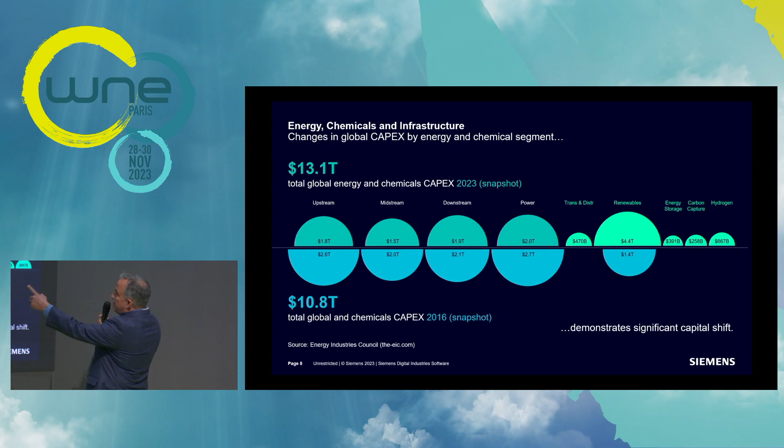And let's look where the money is going. If you look at the EIC, the Energy Industries Council, back in 2016 when I joined Siemens, we took a snapshot of what was currently in planning or execution or decommissioning throughout the energy landscape. You had across the globe over $10 trillion in investment. That's now increased to 13 trillion, and as you can see, it has really shifted into clean energy tech.

And you know, I'll take a moment. I've heard some people say part of the problem is the slope of the line for energy. I would say that we're only going to see more demand for it. So it's that type of energy. It's where are we getting our energy from? I mean, if you imagine nuclear coupled with hydrogen production, imagine the clean footprint you've just developed on the global stage. Incredibly powerful.

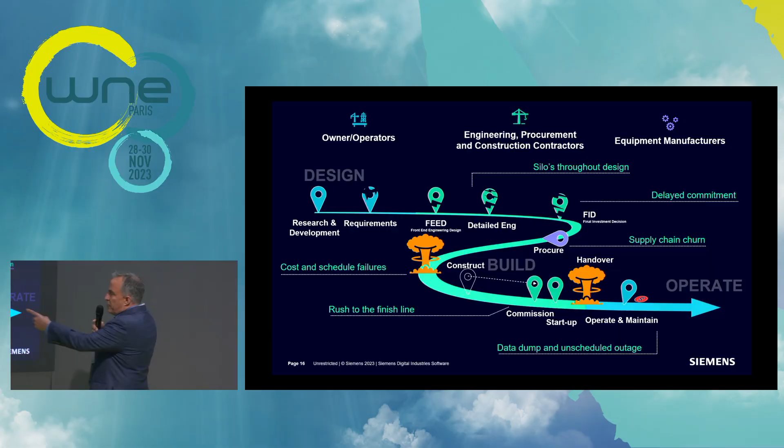And change management during construction is the worst time to manage change. And it happens all the time. Our species has got to get better at doing this. And then construction pushes commissioning forward, or actually back, which then crowds startup, which then does what? It puts a lot of problems on operations' shoulders. So this is typically what we've done. This is what we need to have.

We need to have a solid life cycle, a solid physics-informed digital twin that represents the sum total of all the data, data sheets, drawings, documents, and models that were created, hello, computational fluid dynamics, through the process. We have to have that. Now, it becomes very complex, but it's not. If you create an elegant, not product lifecycle, but capital asset lifecycle management process, then you can bring all of the design from any third party.

And I'll have a story to share if we have the time, or we can share it in the room back there. So I'm not going to steal your thunder so that you can talk about it.

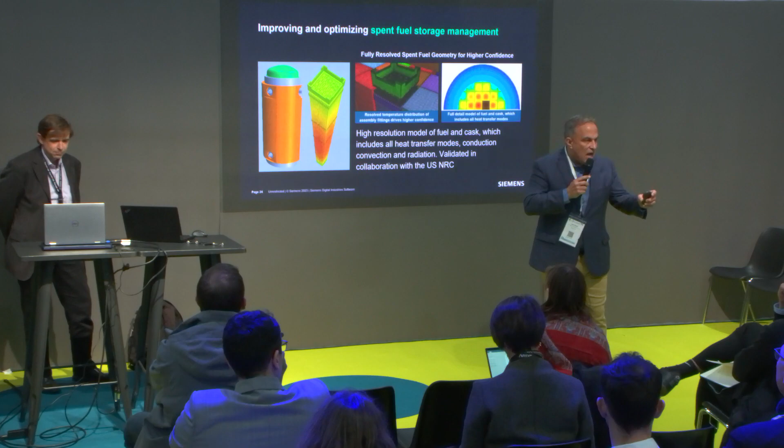But when I talk about simulation, we talk about improved economics for SMRs. You talk about reducing thermal fatigue, exploring sparger configuration, fuel performance, plant-wide performance, and optimizing spent fuel storage. All of these represent how we can turn that life cycle into a solid, well-performed design, build, and operate environment that Nicola is going to talk about, that he's at the heart of.

So again, when you come back to this, we have to be mindful that when you're doing simulations, we have to do it in the context of a broader life cycle mindset, a manufacturing mindset for us in the field. In fact, Brian Ferguson, who used to be the CEO of Cenovus, when we had the last downturn in oil and gas in 2015, and everybody was losing money in energy that was in the oil and gas business, his statement was, we have to apply a manufacturing mindset to capital projects. We have to take that same detailed life cycle view on assets and apply that in the field.

And so now that's driving modular construction. Now that's driving a greater focus on simulation going forward. And what excites me the most is I'm standing here in front of everybody in an industry that is bent on developing a new model. So all of us are students of Buckminster Fuller. All of us are rethinking, how do we actually drive fabrication, align it to requirements, make sure it's adherent to the simulations we did, that the simulations you did are now implemented in the field with that process simulate.

We are here, all of us, building a new model, and nuclear is the new model for our species going forward. And that's what excites me. So while I like to say it's a nuclear renaissance, my colleagues like to say it's a nuclear revolution. And it's not only started, it's actually accelerating.

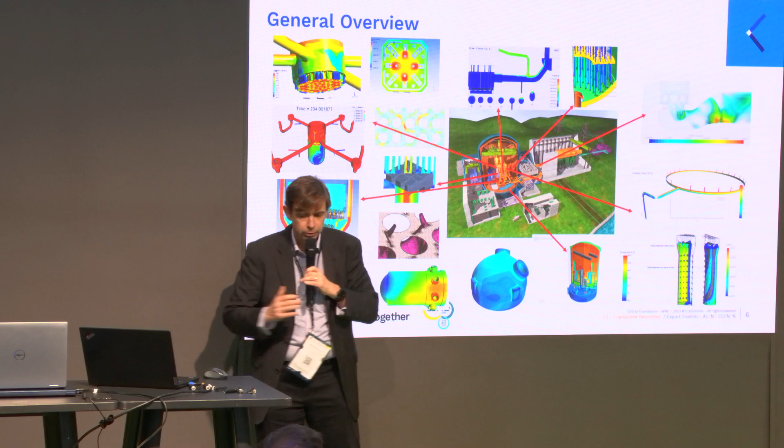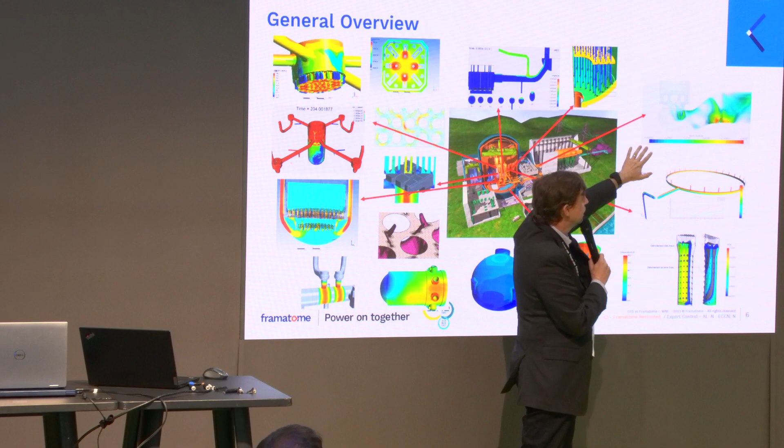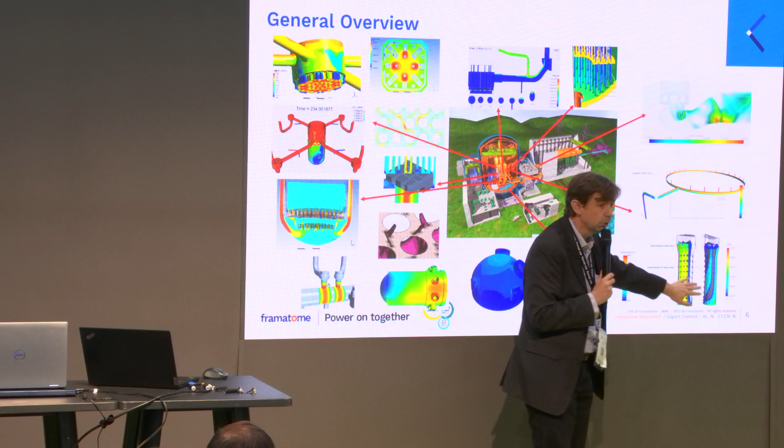We are performing some compressible flow analysis in order to assess the maximal flow rates that you can remove from the safety valves, for instance. We check that the design of the safety valve is okay. We're also working on the secondary side on issues on mixing inside the main feed water torus here or inside the downcomer from the steam generator. All of this means thermal loadings on the components, and we ensure that our components are fit for service for 60 years.

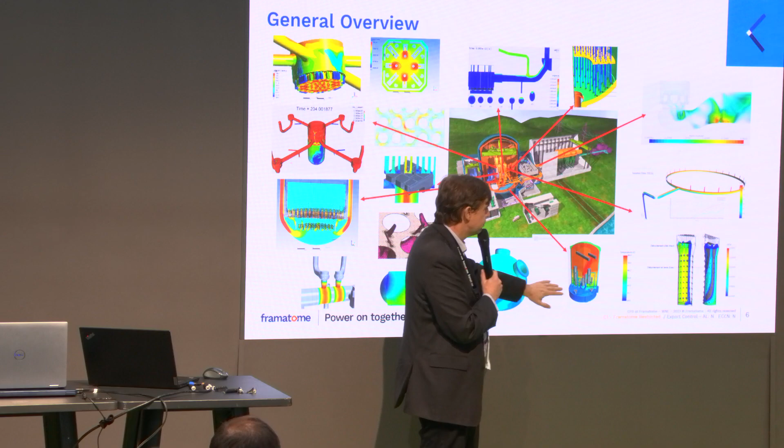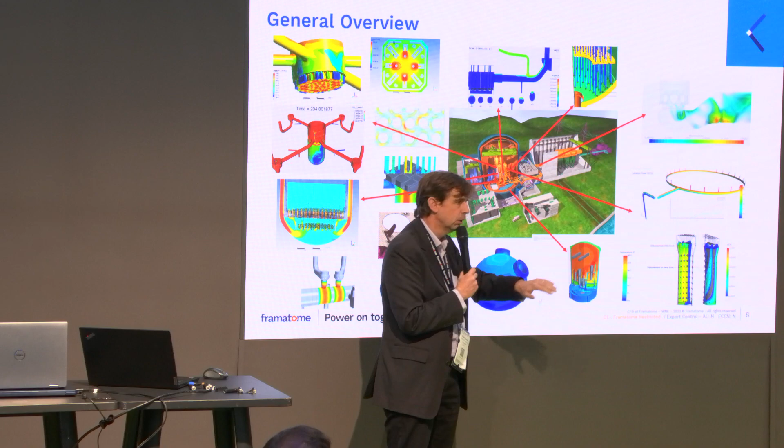But that was inside the pipe. But if you look outside the pipes, then we have also models for the buildings themselves. When you operate the reactor, there's a lot of heat that goes inside the building. During the outages, you want to get inside the building as soon as possible. So we are performing some detailed analysis to inform the people of what would be the expected temperature in the different rooms so that they can access as soon as possible.

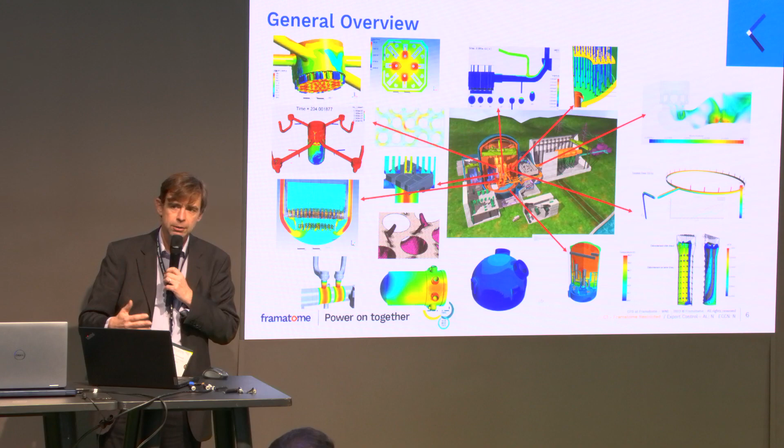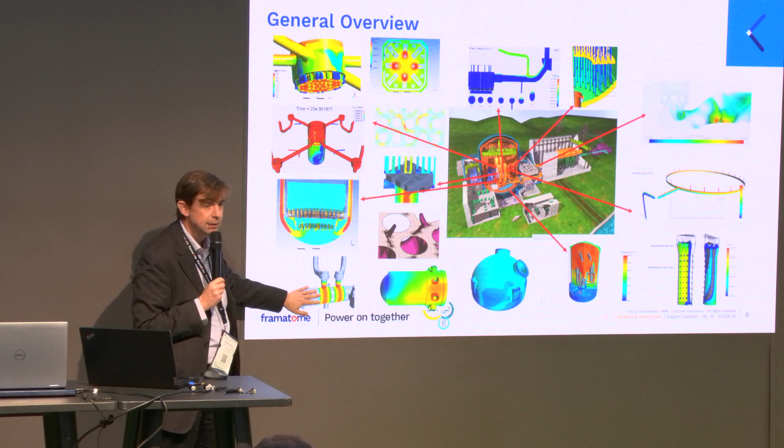And finally, and that will be my example for later, we are also performing a set of computations regarding manufacturing simulation. There's a lot of money at stake during manufacturing. We need to have top quality components, top quality steel, and we are performing some detailed simulations of quenching, of oven heating of the components, and also of post-weld heat treatments of the components.

So I still have a few minutes. Yeah, I will talk a little bit about thermal treatment. So when you're building a plant, a nuclear plant, you need to perform a lot of welds. And these welds will induce inside the pipes some residual stresses. That means that the pipes will be fragilized due to the welding.

What we want to do is to remove these residual stresses, and to do that, we need to heat up the pipes on site at a temperature of about 600 degrees for about 2 hours. And if you do that, then you remove the residual stresses and you get back a pipe that is very strong. What's difficult in this is that when I say about 600 degrees, that means 600 degrees plus or minus something like 15 degrees. So that's very narrow. We have a very stringent specification.

And at this level of temperature, 600 degrees, if you have any default in your thermal treatment process, then that means that you will have cold spots. And cold spots means that the residual stresses are not removed and you are not compliant with the standard.

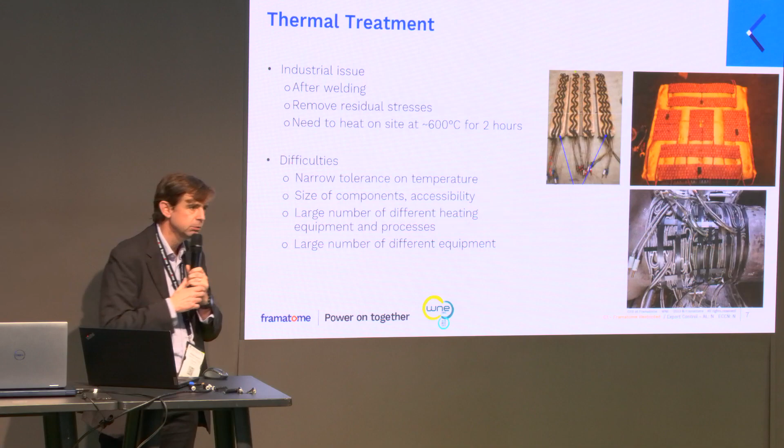The other difficulty is that our components are very large. They are difficult to access because it's a process that you apply on site. And we have a large number of different heating equipment because it's a large construction site. So there are a lot of people working with different technologies. You have here some examples of the different technologies that are being used on site. And of course, we have no right for mistake. That means that we need to have the top quality steel at the end.

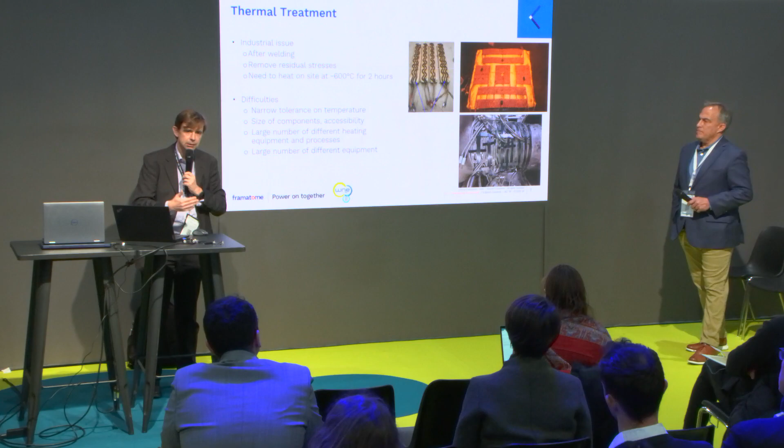So what we do is that for each individual weld, we perform an individual CFD simulation of the heat treatment that is performed after the weld. So for each configuration, you have different examples of configurations here. We will ensure that the heating process will deliver the temperature field inside the pipe that is consistent with the requirements. So it seems easy because here you see just the temperature on the pipes. So you're thinking, okay, this is very easy computation.

The problem is that, in fact, these pipes, some of them are vertical, some of them are horizontal, there are some valves. So there's a gas inside. You cannot just come and plug the pipe because the pipe is what you need to install on site. So it's tens of meters long and you have no access. You cannot plug it. So there is some gas flow inside the pipe. And this gas flow will disturb the temperature field inside the pipe. So that's why we need some detailed CFD analysis.

So what we did is that we performed some steady state computation in order to design the heating process and to be sure that it's compliant. And we also performed some transient computations in order to assess what should be recorded during the treatment itself.

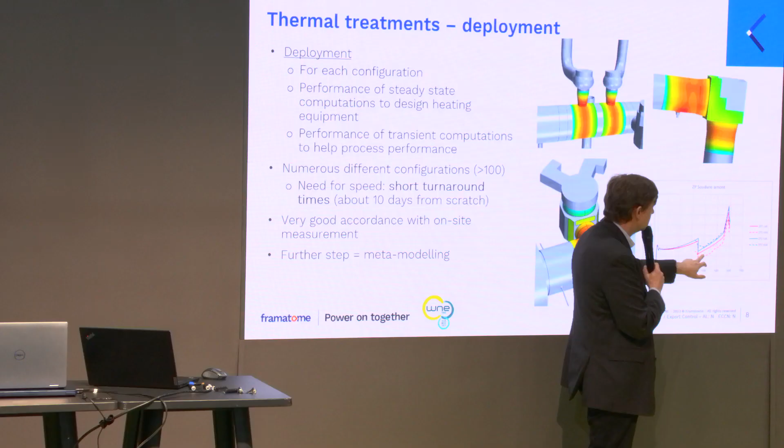That means that the people performing the treatment have before their eyes a curve of recorded data that is the expected value. And that's what you see here. That's the plain line here. That's what is expected during the treatment. And what's actually recorded is the dotted line here. So that was very, very close to the simulation.

And in fact, it was so close to the simulations that when we had a significant deviation, we could be sure that something was going wrong. We could shut down the heating, investigate, and restart with a solution, and you have a perfect heating in the end, perfectly compliant with the plan. So we did that for more than 100 welds.

Now it's really fast. Actually, people think that CFD can be a very long process, but starting from scratch, just with the drawings, you get all the results within 10 days. And once again, you have a very good accordance with on-site measurement.

And the final step is that we are so confident in these simulations that we are actually now performing a set of simulations beforehand by configuration in order to have a database of what could be the results if anything goes wrong. And from this database, we're building what we call a meta model or a reduced order model that can be delivered on site so that the people actually performing the heating have access to this information and they can make meaningful decisions based on 3D computations.

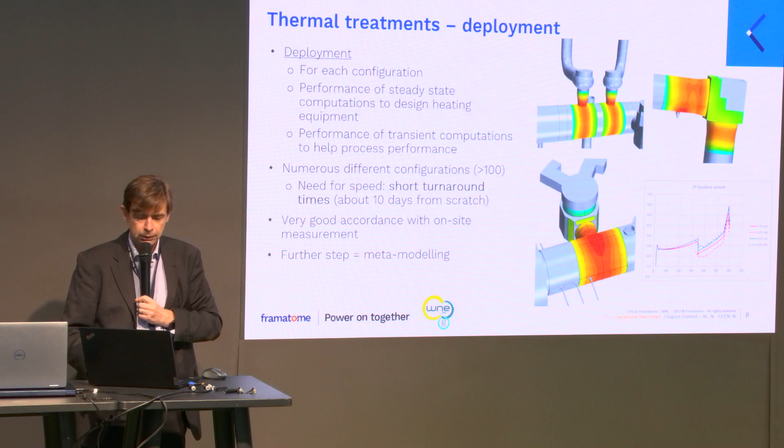Okay, so as a conclusion, when you use it correctly, you can really get much from CFD. It can better represent complex physics. It brings margins to the projects. It also answers the call for a more rigorous safety demonstration. And we have a long and broad experience in this. We can adapt the models to the needs of the projects. We have validated tools, and it's fast enough.